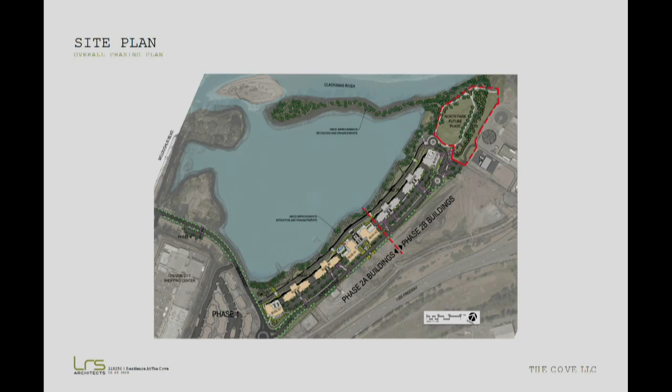To the southwest is Agnes development, Agnes Road coming off of the existing traffic circle and proceeding up towards the north end of the site. There'll be a fire access exit or emergency egress through the road through the wastewater treatment plant. There's a couple of small traffic circles, also one at the other end of the pathway. And we're showing the North Park up there in a future phase. So that kind of sums it up.

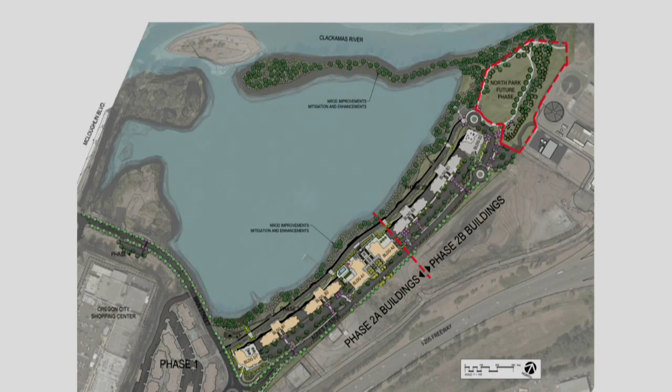There's a double loaded row of parking along Agnes between the buildings and Agnes, and another double loaded parking beneath each of the buildings, so we have subgrade parking in addition to the surface parking. If you have any questions as we're going through, or want me to expand on something, I'd be happy to do that.

The next images, you've seen a couple of these before. This is the architect's rendering of what the buildings and landscape could look like. What I've included this time is what the landscape architect thinks the buildings will look like with the plantings more developed. Ignore the buildings, they're the same, they just don't know color very well. They've enhanced the plantings to show where they think this will be as the plantings develop into a more mature state.

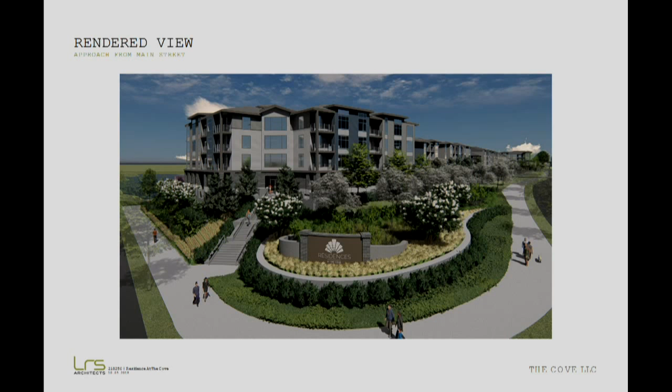The access point, the monument sign for the development, is shown here. We've got a couple others along the edge. This is Building D, along Main and Agnes. Because of the floodplain, the building is quite high up on the site here. Main Street is in the floodplain here, and Agnes pulls out of the floodplain a little bit.

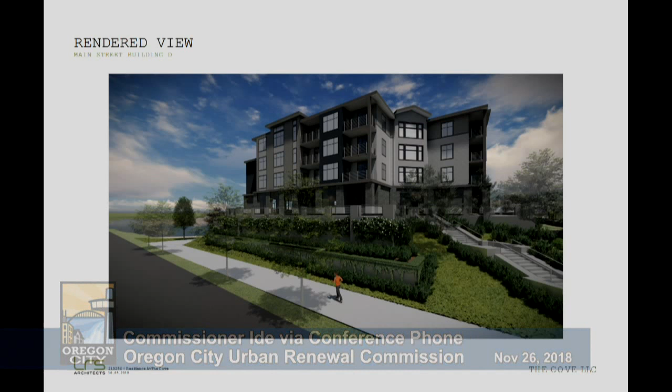The parking and the building itself is set just above the floodplain, so you're seeing a little retaining wall which is hiding the vehicle parking underneath, and we're using landscape to screen the vehicle parking and retaining walls along this edge. Towards the left side of the image is the access to the bike path and the pedway. Looking back the other direction, the live-work units, which you'll hear more about, are located on the faces towards Main Street here.

The base of the building is a brick masonry material, a storefront with live-work units up on the street. We're looking at options now to put a couple more in the ground level of the D building, but you'll see them also in the floor level of the B buildings. So anywhere we're facing Agnes or Main Street, we're aiming for that.

So that's the existing elevation of Main, right? Correct. Compared to somebody standing up there on that walkway, what's the height? It's about 12 feet. Might be a little taller than that. 17 feet. From the top of his head to the top, it's about 12.

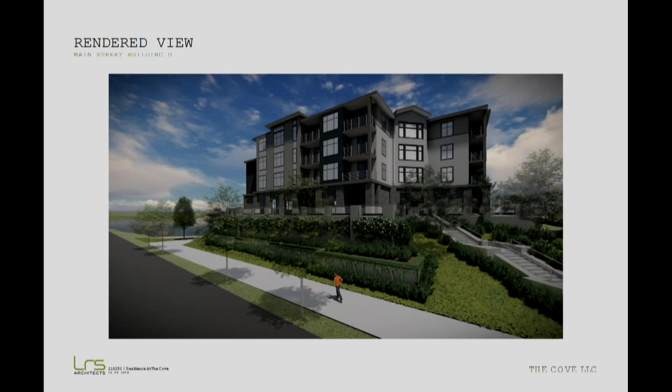So clearly Agnes and the buildings are out of the floodplain. Assuming there is a flood someday, how would people be getting in and out? That is the access point through at the north end of the site, through the wastewater treatment plant. That road will continue on and connect to the street at the other end of that development.

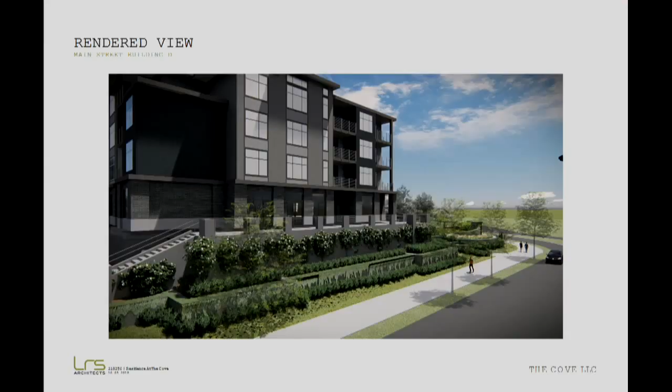Okay. Oops, got that one in there twice.

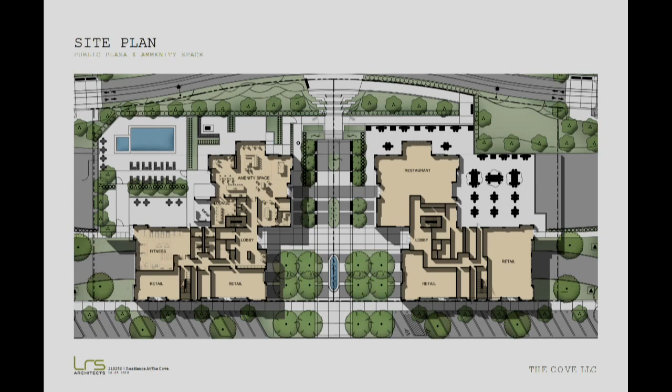There's a lot of landscaping on both ends of it, and we're trying not to over-landscape so people can use it for other things. Maybe there's benches, maybe other things happen, so you can get a lot more people there if there's a special event on those surfaces.

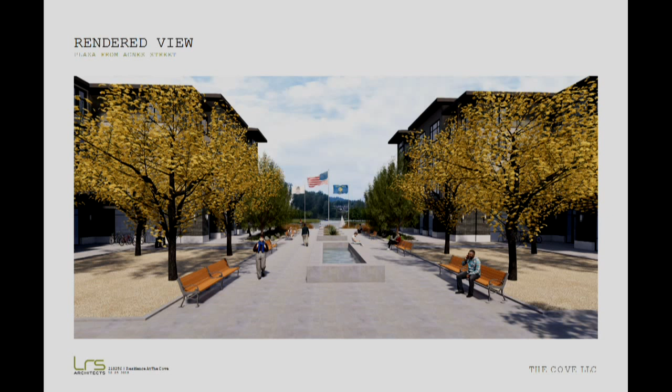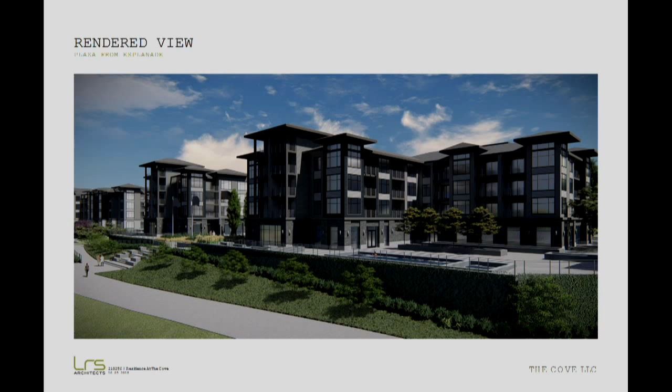This is the architect's view of the patio from the cove side, and then the landscape architect's view of what the more mature landscaping is going to look like here. We haven't decided what that edge railing is yet - that's one of the design development pieces we're working through. Those are the types of things we're in the process of at the moment that'll come into the more detailed application for land use.

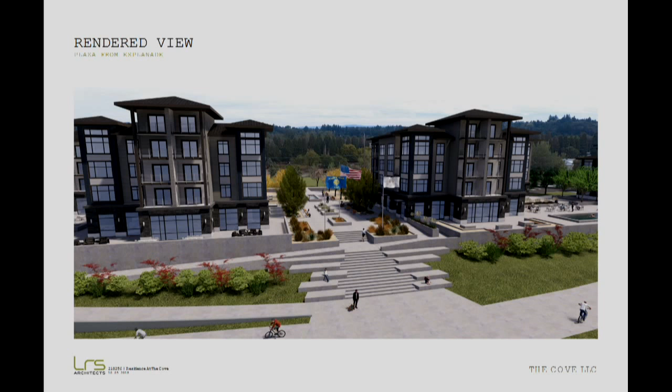Again, the plaza - you've seen this image before - but the stairs coming down to the river trail, basically, and the ramp to the left is for bicycles and accessibility. There's a lot of seating areas, seating opportunities, a lot of spots to just sit and see what's going on and watch people, with activity going on there with joggers, walkers, bicyclists and dogs.

This next one is the landscape architect's view of that same image, a little more mature landscaping, as I mentioned.

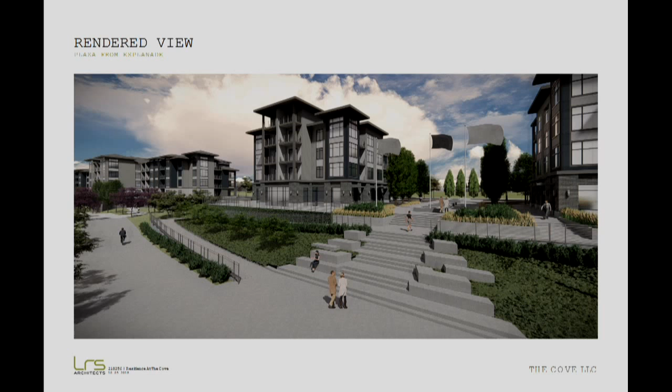And then the view of the overall complex from a distance, just to see what this will look like. The restoration of the cove is something that's not going to be represented here in a graphic - that's something we can talk about, or questions can be asked. So it gives you a sense of what's beyond and what the buildings will tend to look like.

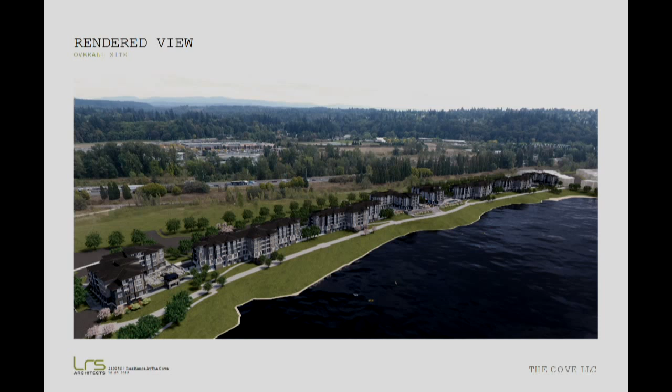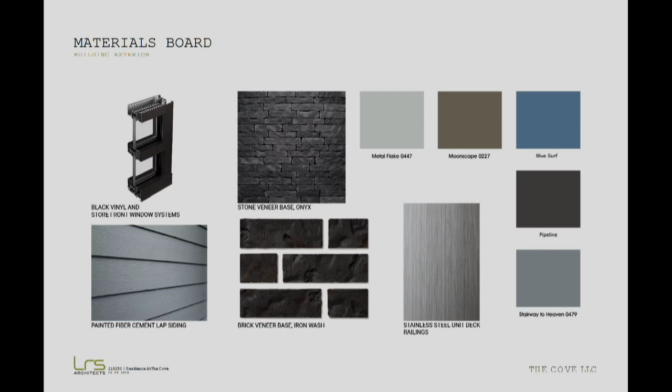I have a little more detail on the exteriors. Last time we've seen the materials - generally the brick, the lap siding, the general color scheme that we're aiming towards at the moment.

This is a partial view of one of the buildings, I don't remember which one, but it has the brick base. There's going to be a concrete anchor to that brick base. The grayish brick color, and the glazing at ground level will be storefront, very retail representation.

So this lower floor represents what the live-work units will look like? Correct, I believe this is building A, so the amount of glass we're seeing are the retail spaces, but it'll be a commercial storefront type. Up above, nearly all the units have patios and decks, which you can see represented here with French doors, sliding glass doors, and large windows in the living spaces.

You can also see in this image some of the roof lines. It's a little subtle on top, but we've got areas where the top floor has taller windows and different roof lines in the living room spaces, which gives the buildings a little variety.

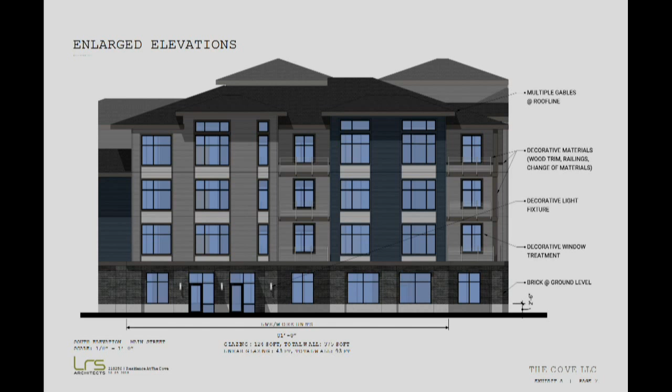Okay, that is it. Any questions?

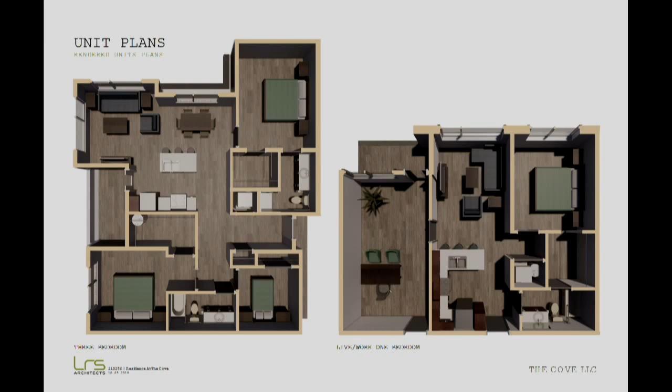Well, it's pretty exciting. I think this has been going on too long - 10 years. Because I know I sat on urban renewal for about 4 years, and this was here then. Then 4 years as a commissioner, it's still been here. So I've been at it for 8 years. This is a thrill for me to see this come to fruition tonight.

So I like the way it's - there's two separate projects, we'll call it phase one across Main Street, and then you folks - they complement each other, but they're different. I'm happy to see a variety of architecture down there. Also for Mr. Deacon here, anytime you take on these kinds of projects there's a certain risk, and there's only a certain amount of developers that want to do that anymore.

So thank you for stepping up here and doing this, sir. That's all I got. Move to approve the Cove Disposition and Development Agreement approval of preconditions.

Second. It's been moved by Mayor Holliday and seconded by Mr. Shaw. Please call the roll. Commissioner O'Donnell, Aye. Commissioner Mitchell, Aye. Commissioner Holliday, Here. Aye. Commissioner Shaw, Okay. Commissioner Ide, Aye. Chair Mengelberg, Aye.